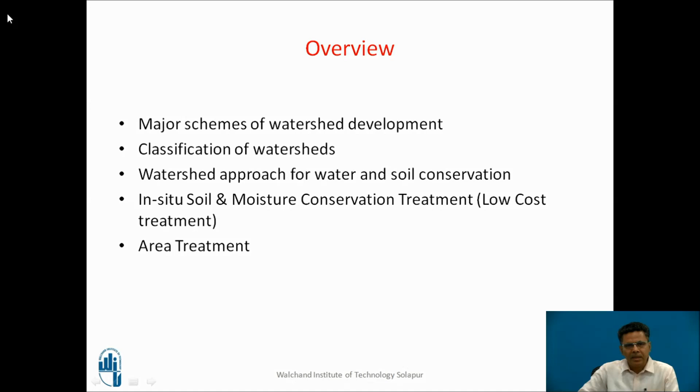What activities can be taken up in a watershed? Different sectorial activities can be taken up, such as soil conservation, water harvesting, rehabilitation of degraded areas, social forestry, agroforestry, horticulture, silvipasture, etc. These are distributed in different watersheds in different parts of a district.

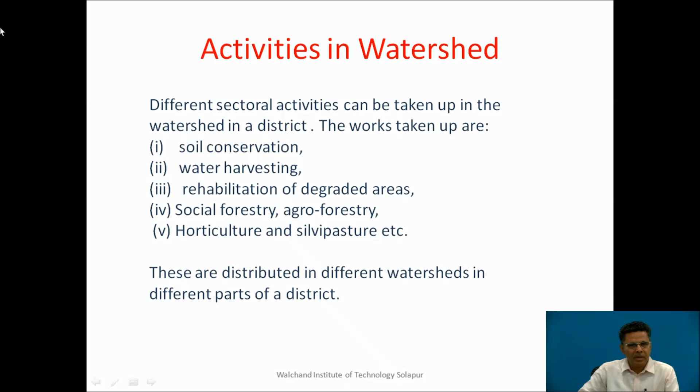Now let us see what is a watershed. A watershed is a geohydrological unit draining to a common point by a system of drains. We can observe this ridge line, which is a water divide, and a river originates from here, proceeds further, with tributaries joining it. As the river approaches the sea, it collects more discharge, gathering both water and sediments from the watershed. So both water management and sediment management are important.

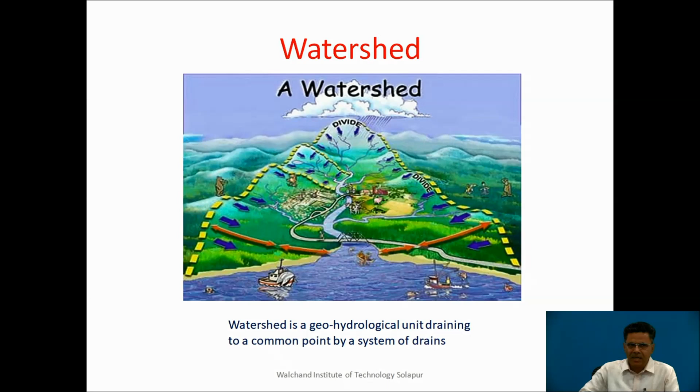Now let us discuss the definition of watershed development. A watershed is a geohydrological unit draining to a common point by a system of drains, as we have seen. Watershed development refers to the conservation, regeneration and judicious use of all natural resources, particularly land, water, vegetation and animals, and human development within the watershed.

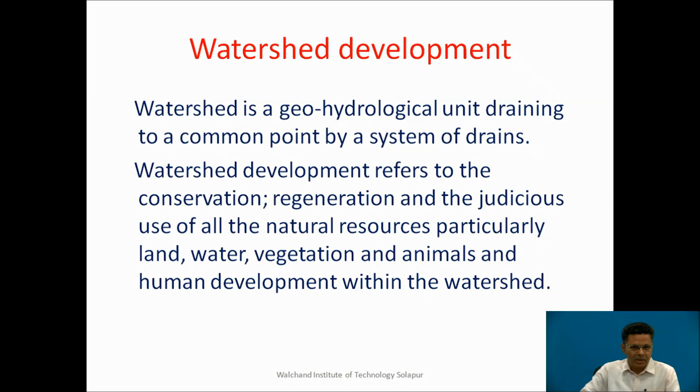What is watershed management? Watershed management is a term used to describe the process of implementing land use practices and water management practices to protect and improve the quality of water and other natural resources within a watershed, by managing the use of those land and water resources in a comprehensive manner.

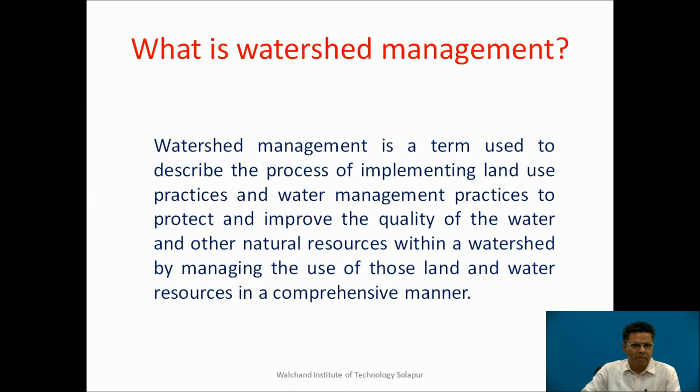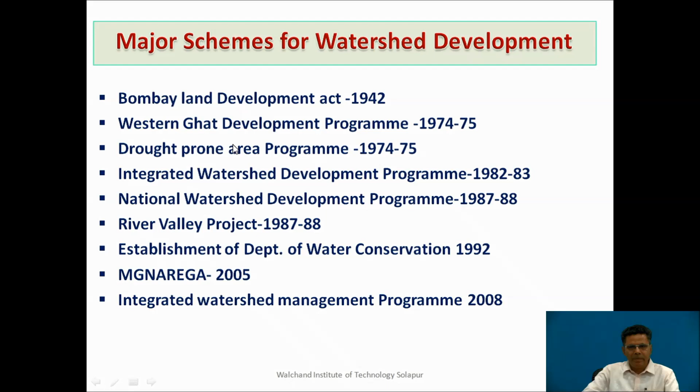Here are the major schemes implemented by the Maharashtra state government for watershed development over time: the Bombay Land Development Act 1942; Western Ghat Development Program in 1974-75; Drought Prone Area Program launched in 1974-75; Integrated Watershed Development Program started in 1982-83; National Watershed Development Program in 1987-88; River Valley Project in 1987-88; Department of Water Conservation for Maharashtra State established in 1992; MGNREGA started in 2005; and Integrated Watershed Management Program from 2008. All these schemes focus on watershed development and management in a broad sense.

Watershed treatment has been implemented in different ways over history. Compartment bunding below 750 mm annual rainfall was implemented from 1943. Graded bunding in assured rainfall zones was practiced from 1958. Terracing for high rainfall zones started from 1959. Earthen Nala Bandharas started from 1969, land leveling from 1985, diversion and cement nala bunds in 1989, EGS-linked horticulture from 1990, gabion structures from 1994, CCT and farm ponds from 1995, and deep CCT from 2012.

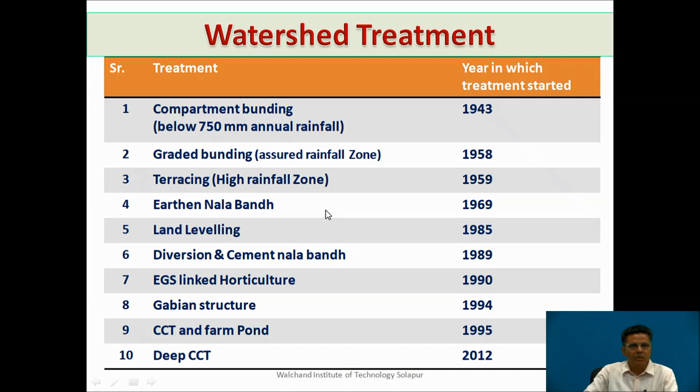Now let us see how watersheds are classified based on extent of area. When area is between 500 to 600 hectares, we call it a micro watershed. A watershed of area 3000 to 5000 hectares is a mini watershed. Area 15,000 to 20,000 hectares is called a sub watershed, whereas 30,000 to 40,000 hectares is called a GSDA watershed, and for a river valley there is no limit of area.

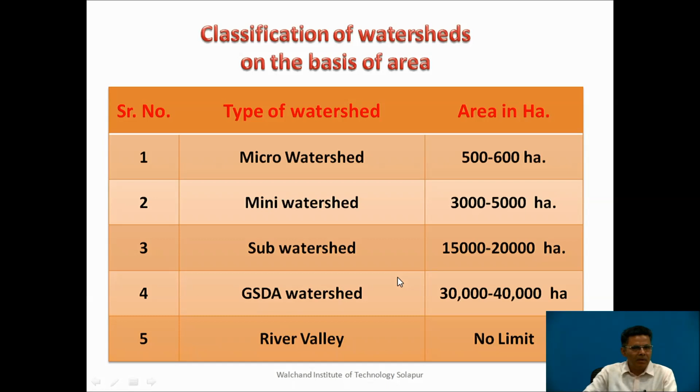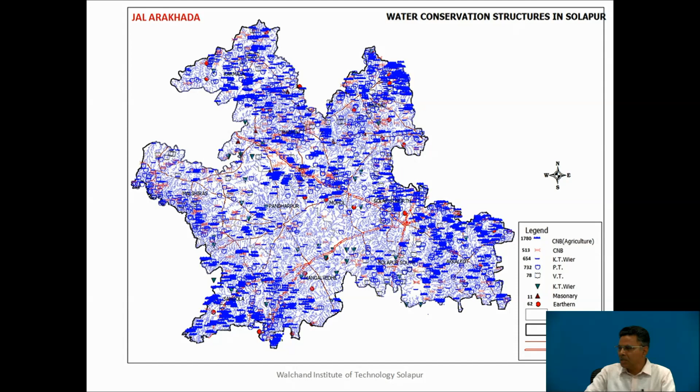This particular map shows the water conservation structures prevailing in the Solapur district of Maharashtra state. It gives an idea about the CNBs, KT weirs, masonry structures, earthen bunds, etc.

Now let us discuss what is meant by a watershed approach. This is a watershed and this is a ridge line of watershed, meaning it is a water divide. A drop of water falling on this side of the ridge line will come into this river system, while a drop falling on the other side will not come to this watershed.

The first zone near the ridge line is called the runoff zone. In this green shaded zone, here we provide the upper reaches treatment.

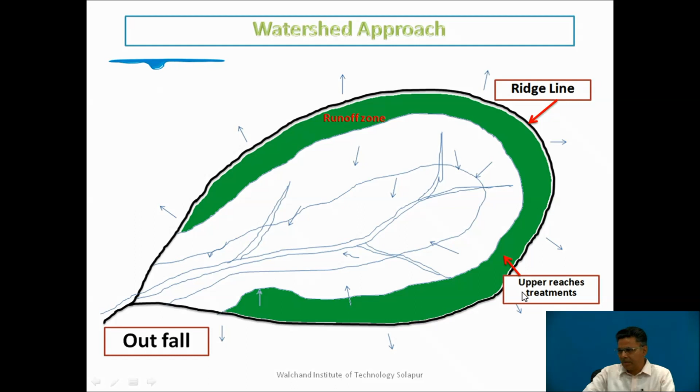Next, the zone in yellow is called the recharge zone, and the next zone is the storage zone. Three types of watershed development structures will be constructed, and they are different for runoff zone, recharge zone, and storage zone. The runoff zone has steeper slopes, the recharge zone has mild slopes, whereas the storage zone comes along the length of a river where we construct water and soil conservation structures.

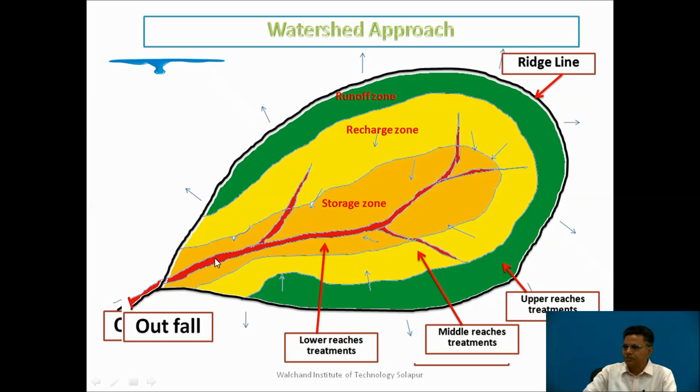This is the outfall of this catchment. This particular figure gives us the idea about the different structures which are constructed in the watershed.

For this hillock we see vegetative bunds, and on this hillock you can see typical continuous contour trenches. Here in low reaches we see Vanarai bandharas constructed, and here we see earthen structures like percolation tanks. Terracing is also done at higher elevations and so on.

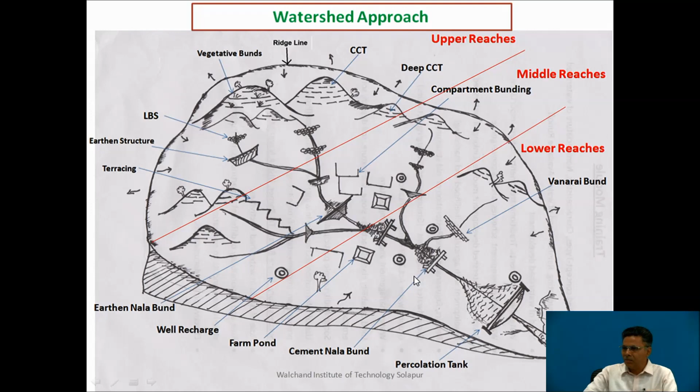Wells are recharged in the recharge zone. In agricultural fields we can have farm ponds, whereas cement nala bunds are constructed across a nala. This is a percolation tank, which we call Pazar Talav in Marathi. These are different structures constructed in a watershed for water conservation as well as soil conservation.

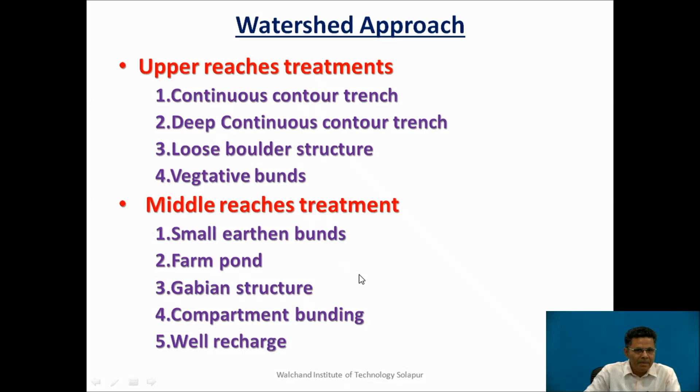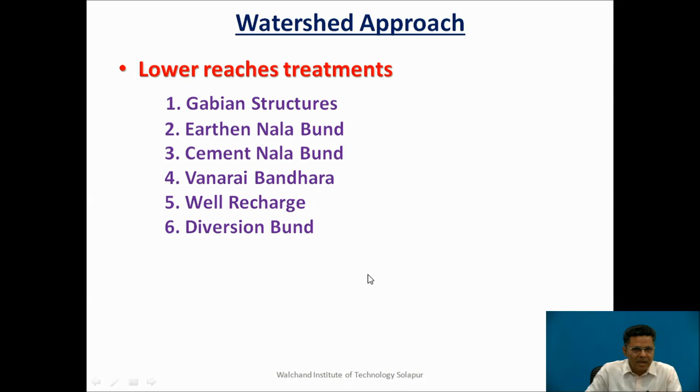Now let us discuss what type of treatment is given in upper, middle, and low reaches. In upper reaches we can go for continuous contour trenches, deep continuous contour trenches, loose boulder structures, and vegetative bunds. In middle reaches we can have small earthen bunds, farm ponds, gabion structures, compartment bunding, and well recharge. In low reaches we have gabion structures, earthen nala bunds, cement nala bunds, Vanarai bandhara, well recharge, and diversion bunds.

Let us see those one by one. The approach can also be discussed as area treatment, drainage line treatment, water management, and crop diversification. In area treatment we go for continuous contour trenches, deep continuous contour trenches, vegetative bunds, compartment bundings, well recharge, graded bunding, farm pond, and terracing.

For drainage line treatment, one has to adopt loose boulder structures or gabion structures, earthen nala bunds, cement nala bunds, Vanarai bandhara, diversion bunds, and percolation tanks. One should also think about water management and crop diversification for effective management of available water.

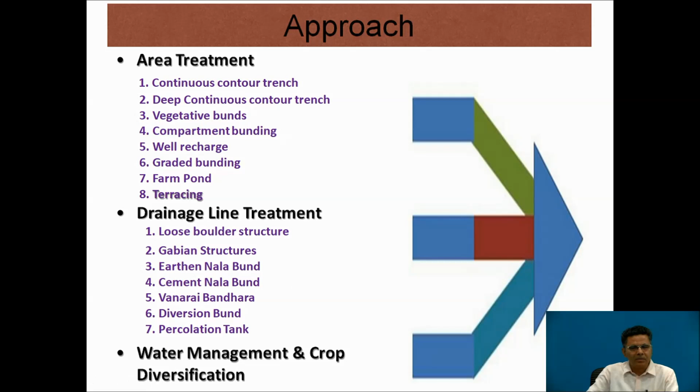Here, in situ soil moisture conservation treatment can also be called low cost treatment. The first technique is sowing and intercropping on contour, as shown in this example. We know water flows perpendicular to the contour, and we find that the water gets more time to penetrate into soil when cropping is provided along a contour.

One can also go for mixed cropping as shown here, which is also one of the best ways for soil and moisture conservation. Also one can have dead furrows, and also go for mulching. In mulching, dry leaves of vegetation are spread over the soil, which avoids direct penetration of sunlight into soil and thus conserves the moisture available with the soil to a great extent.

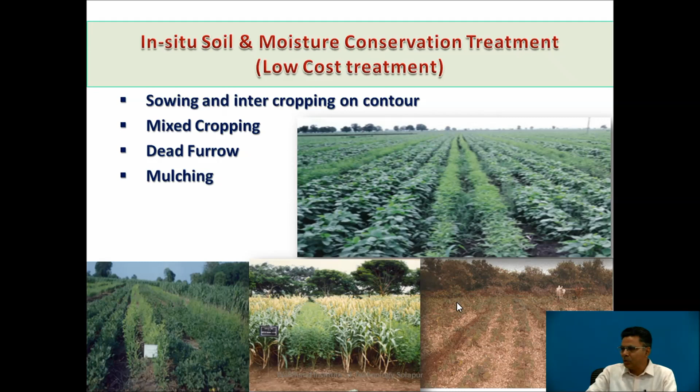Now let us discuss area treatment. The first technique of area treatment is the continuous contour trench. This is an upper reach treatment where slopes are reasonably steeper. It reduces the speed of water flow, conserves the soil, increases infiltration of water into soil, and increases area under cultivation. It is recommended for slopes from 0% to 33%.

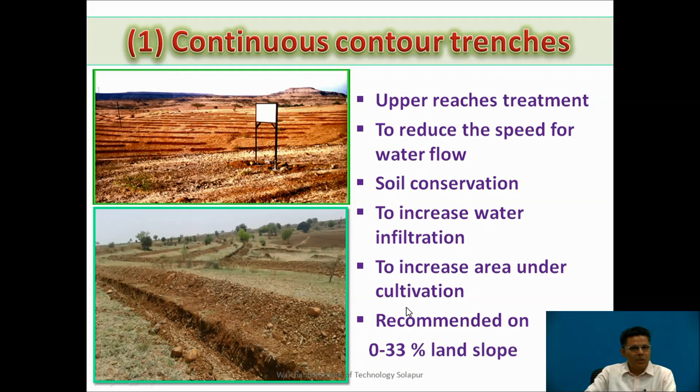So these are the pictures of the continuous contour trenches. These trenches are dug along the contours. You can see a person standing in the CCT, showing the depth of water and the volume of water that is collected.

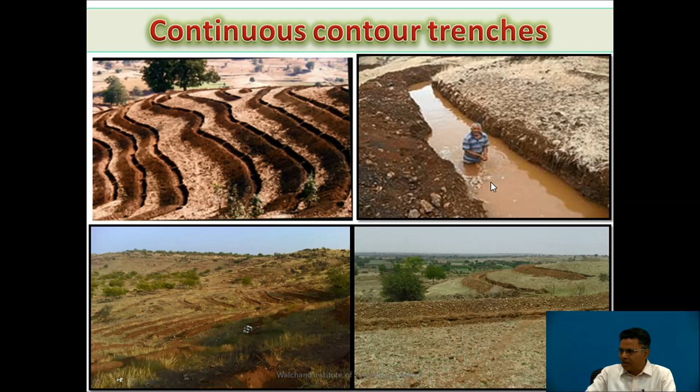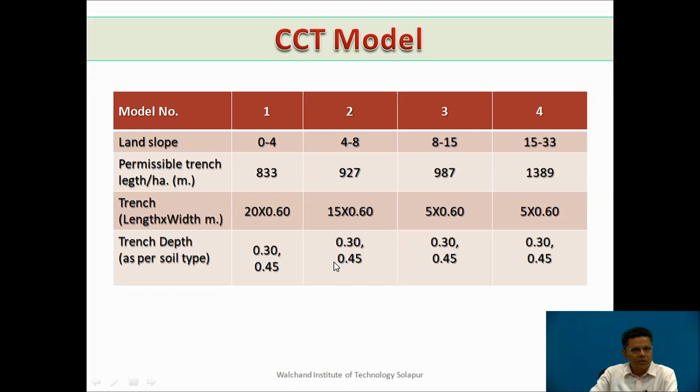One can have a number of models of continuous contour trenches depending upon the land slope: 0 to 4%, 4 to 8%, 8 to 15%, and 15 to 33%. In this model, for 4 to 8% slope, the permissible trench length per hectare can be 927 meters, meaning in 1 hectare you can have trenches of total length 927 meters. For a particular trench, the length should be 15 meters, the width 0.6 meter, and the trench depth will depend upon the soil type, which can be 0.3 meter or 0.45 meter and so on.

Now let us discuss deep continuous contour trenches. These come under upper reaches treatment and are effective in DPAP areas. They improve groundwater level by percolation, conserve soil, and water storage up to 2.4 lakh liters per hectare can be achieved.

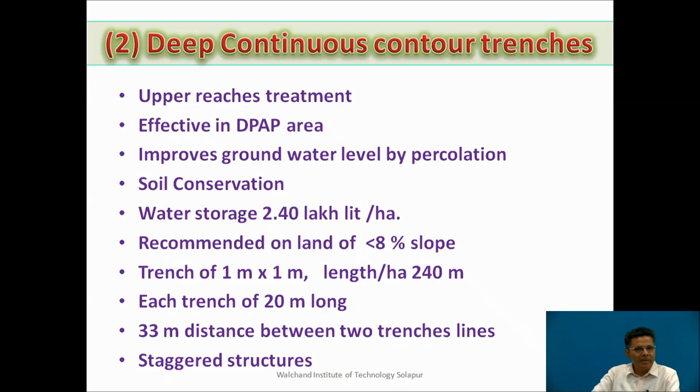Deep continuous contour trenches are recommended on land with slope less than 8%. A trench section is 1 meter by 1 meter, with length per hectare up to 240 meters. Each trench may be 20 meters long, with 33 meters distance between two trench lines, and the structures are to be staggered.

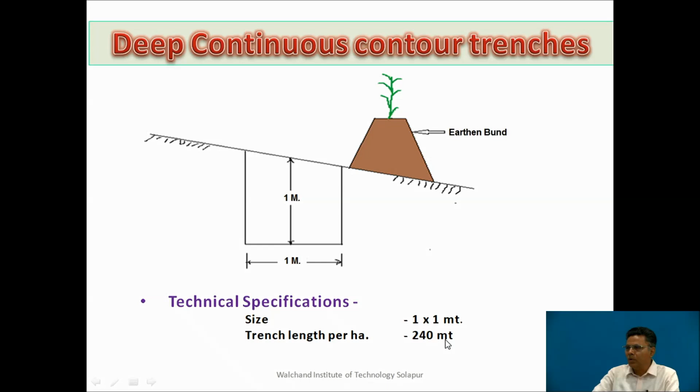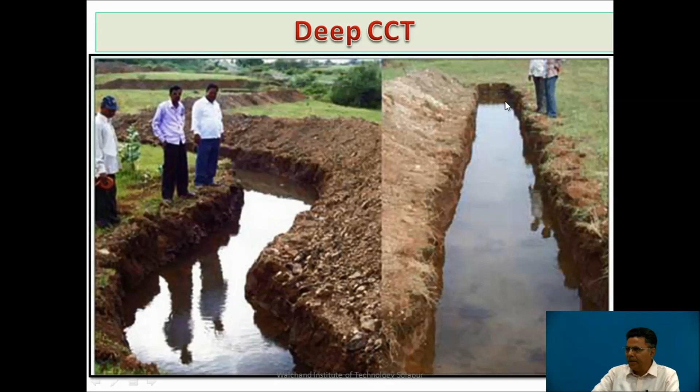If you see carefully, the section is 1 meter by 1 meter. This is the earthen bund, and the trench length per hectare is limited up to 240 meters. So these are the deep CCTs, where the width, depth, and length of an individual trench can be understood.

Let us discuss once again. Compartment bunding is a middle reaches treatment. It is used to improve the water holding capacity of soil, improves soil fertility, and conserves soil. It is recommended in areas where rainfall is up to 750 millimeters.

It is recommended for land with slope up to 4%. Work should be done with the ridge to valley concept. It must be on a continuous total area, not a scattered area. Prepared bunds should be protected by farmers with vegetation, and a waste weir is a must to remove excess water.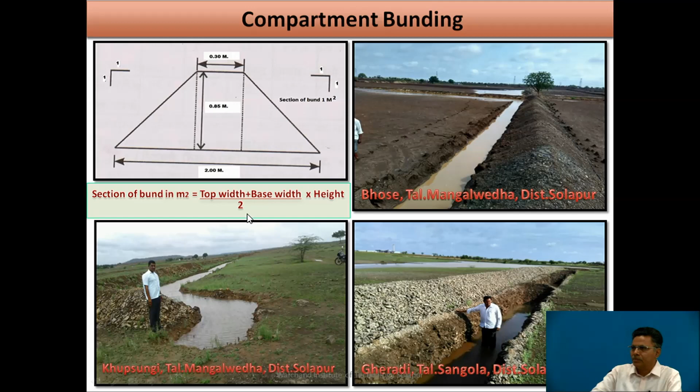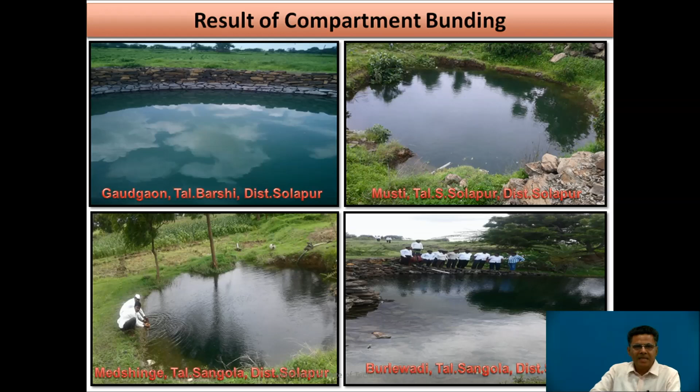One more way of water conservation is well recharge. Let me first show you the picture. This is a well, and here there is a filter tank to prevent sediments from entering the well. This is a storage tank of raw water, which passes through the filtration tank and then goes into the well.

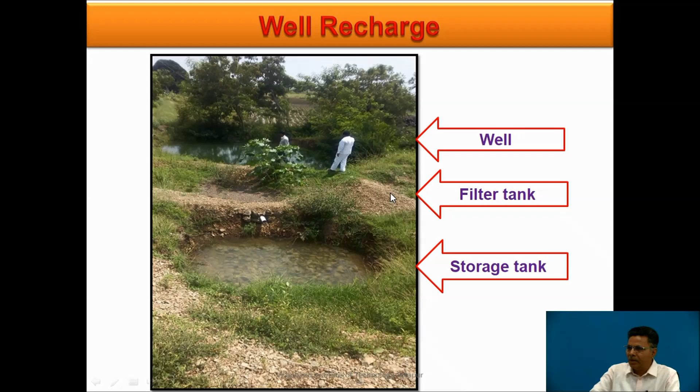So the same schematic is shown here. This is a storage tank, which receives water from the inlet. Thereafter it is passed to a filter consisting of sand, gravel and stones, and then the water is allowed to go into the well for recharge.

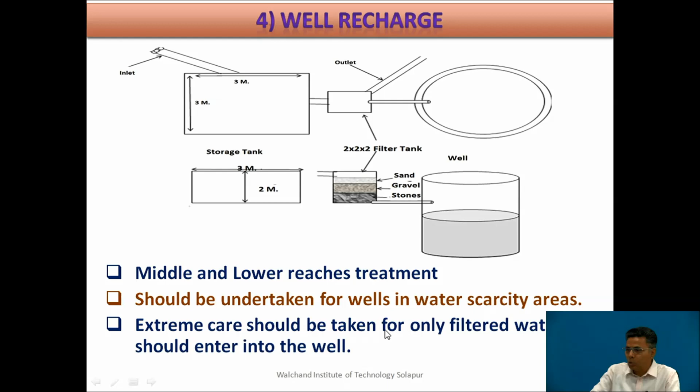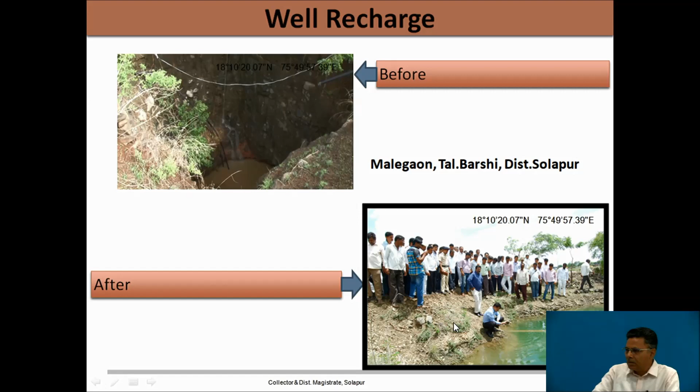This is a middle and low reach treatment. It should be undertaken for wells in water scarcity areas. Extreme care has to be taken so that only filtered water enters the well. So before adopting well recharge techniques, see at what depth water is, and after recharging the same well, one can see the considerable rise in water level.

We can see the well recharge work ongoing here. This is a filter under construction, and this is filtered water coming inside the well for recharge. So this is the recharged well. Just see the arrangement of recharging, with filtered water coming into the well which is constructed with a concrete wall.

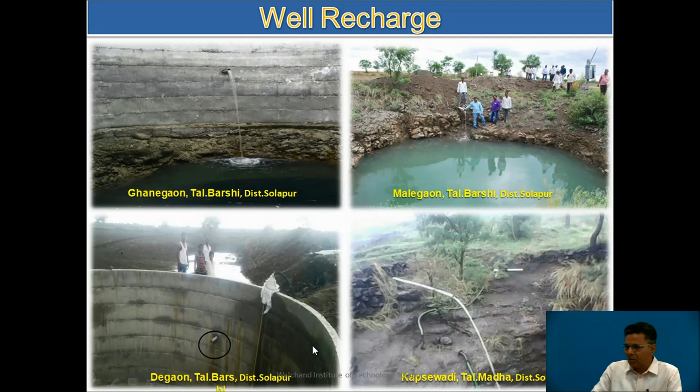We can recharge the tube well also. So here we see how tube well recharge can be done.

Now, farm ponds. A farm pond is a middle reach treatment. It is constructed on private land and the water is used for protective irrigation. It improves groundwater level and is recommended on land with up to 3% slope.

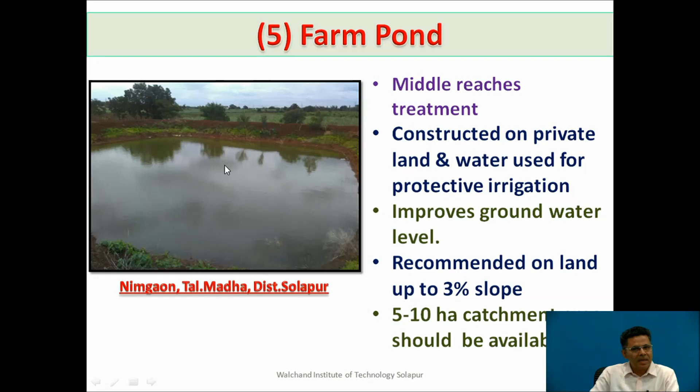A farm pond should have a catchment area of 5 to 10 hectares so that sufficient water can be stored in the farm pond. The water from the farm pond can be used for supportive irrigation for horticulture as well as other crops.

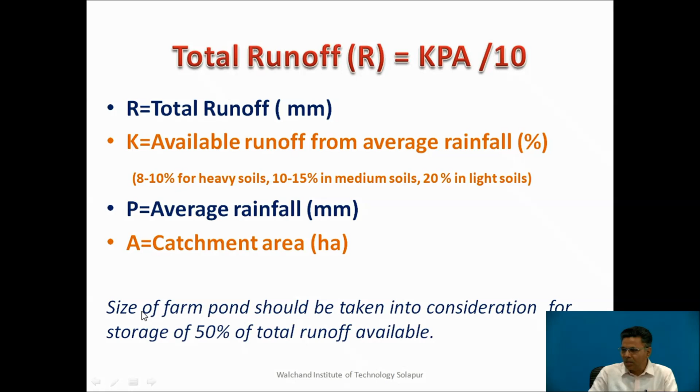Total runoff is given by the equation R equals K into P into A divided by 10, where R is runoff in millimeter, K is available runoff from average rainfall percentage. The values are 8 to 10% for heavy soils, 10 to 15% for medium soils, and 20% for light soils for K, whereas P is average rainfall in millimeter and A is catchment area in hectares. The size of the farm pond should be taken into consideration for storage of about 50% of total runoff available.

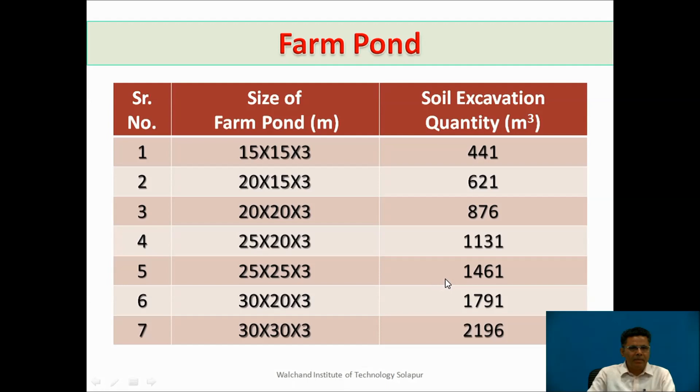This slide gives us the sizes of farm ponds and required soil excavation in meter cube. So for a farm pond of size 25 meter by 25 meter and 3 meter deep, we may need to do excavation of 1461 meter cube.

Here we can see the farm pond, see the slope which is given to the sides of a farm pond, and when water is stored in the farm pond, how it looks. One can also use plastic paper to reduce the seepage of water through the farm pond.

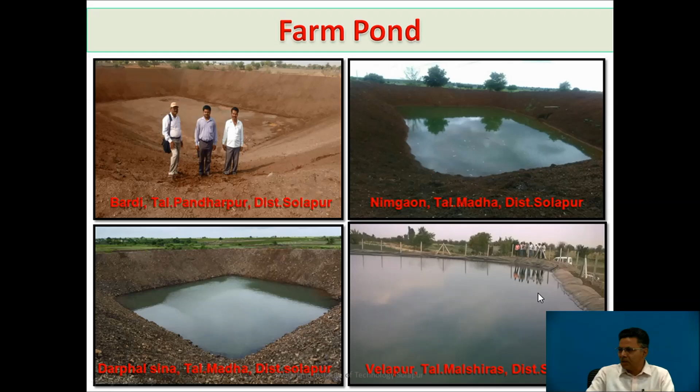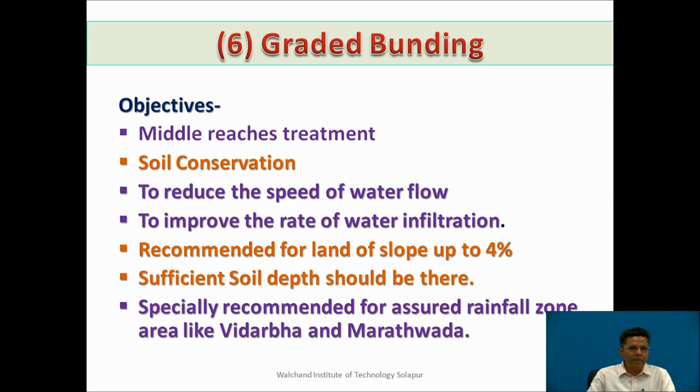Next technique is graded bunding. Objectives are such that it is a middle reach treatment. It is used for soil conservation as well as water conservation. It reduces the speed of water flow, improves the rate of water infiltration, and is recommended for a slope up to 4%. Sufficient soil depth should be there when we want to adopt graded bunding, and it is specially recommended for assured rainfall zone areas like Vidarbha and Marathwada.

So just see, this is a graded bunding. Technical specifications again depend upon slope. For example, for a slope of 2.4%, the base width can be 2 meter, the height of the bund can be 0.75 meter. The top width should be 0.5 meter, and the side slope has to be 1:1.

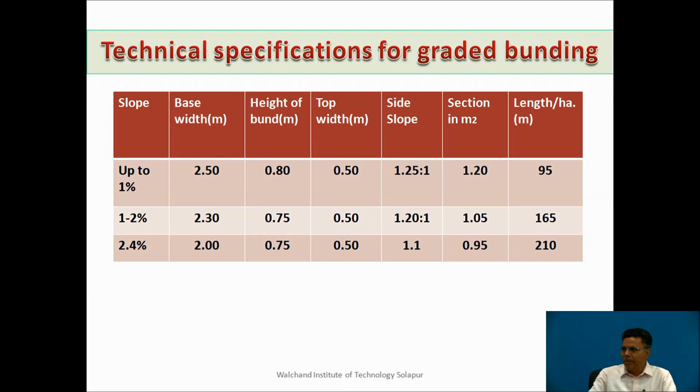Section in meter square will be 0.95 meter square, and length per hectare can be 210 meter. So in 1 hectare area you can have about 210 meter length of the graded bunding.

Now terracing. So just see, this is a terracing. In steeply sloping areas, when we want to go for agriculture, we need to construct such terraces. Terracing is an upper reaches treatment. It is recommended in high rainfall zones, that is more than 1000 meter, and in paddy areas, meaning in Konkan regions we adopt this.

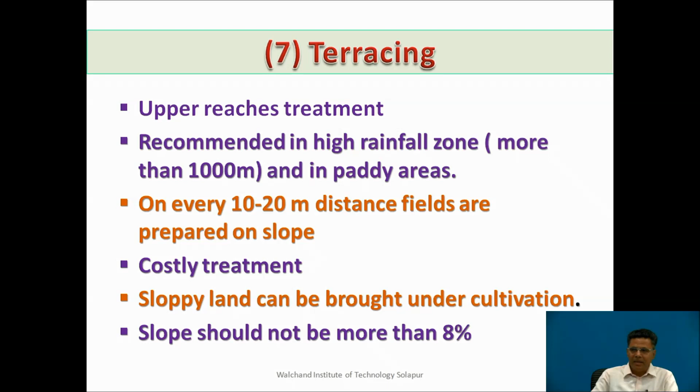On every 10 to 20 meter distance, fields are prepared on the slope. It's a costly treatment. Sloping land can be brought under cultivation by terracing. Slope should not be more than 8%.

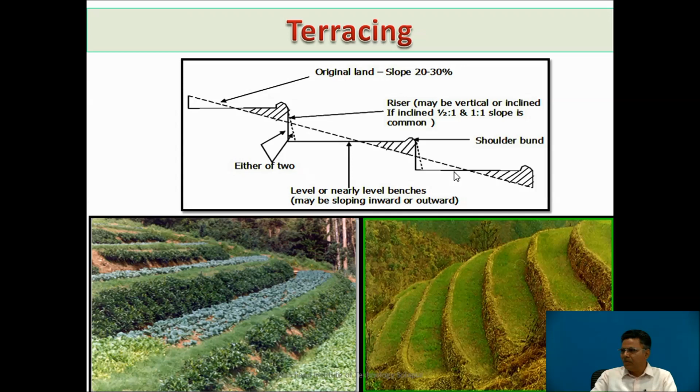So just see here, this dotted line shows the original land of slope 20 to 30%, whereas this is a modified profile of a land. We cut here and we fill here, and this is a shoulder bund. Benches are constructed here, and then we have these terraces here where one can go for a crop in this way.

Now let us discuss how we go for drainage line treatment. The first treatment which we discuss here is loose boulder structures.

This is an upper reach treatment in hilly areas and light soils where continuous contour trenches work is not possible. We should have sufficient boulder stones available nearby, and then these loose boulder structures will make the running water slow, giving time for percolation.

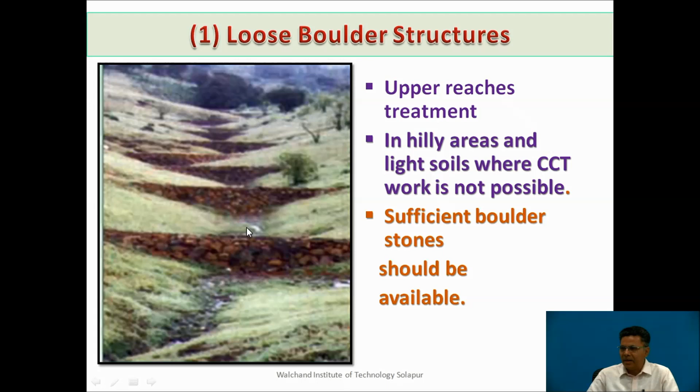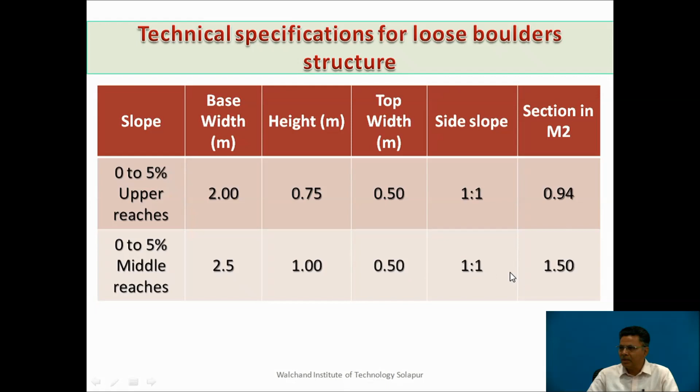It will also conserve soil and water reasonably. The technical specifications for loose boulders, for example, for a slope of 0 to 5% in middle reaches: the base width can be 2.5 meter, height can be 1 meter, top width can be 0.5 meter, side slope can be 1 to 1, section 1.5 meter square.

So one can see the loose boulder structures which are constructed at Boroti in Akkalkot Taluka of Solapur district. Here this is a loose boulder structure constructed at Tarangphal, Malshiras Taluka, Solapur.

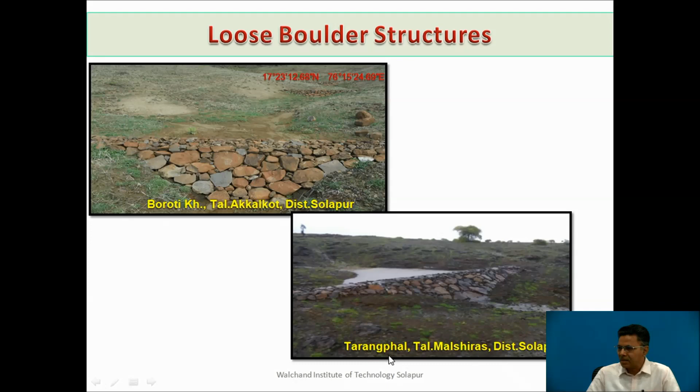Now let us discuss earthen structures. Earthen structures are upper and middle reach treatments. Earthen bunds are prepared in upper reaches where loose boulders are not available.

It reduces the speed of water flow, improves the rate of water infiltration, and conserves the soil. The catchment of such an earthen structure should not be less than 10 hectares.

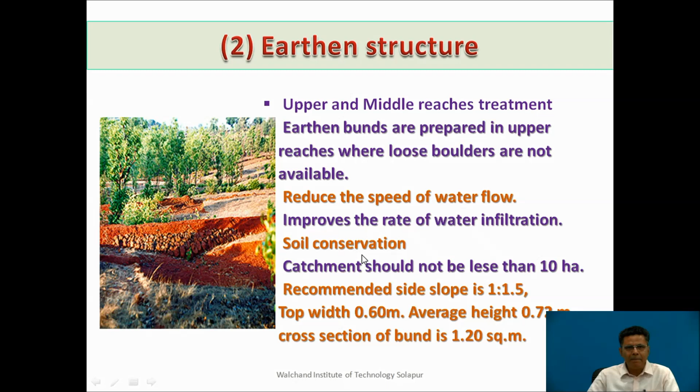Recommended side slopes of this structure are 1 is to 1.5, top width 0.6 meter, average height 0.72 meter, and cross section of the bund is about 1.2 square meter. So these are the type designs for the earthen structures. Now slightly bigger than that, there is an earthen nala bund.

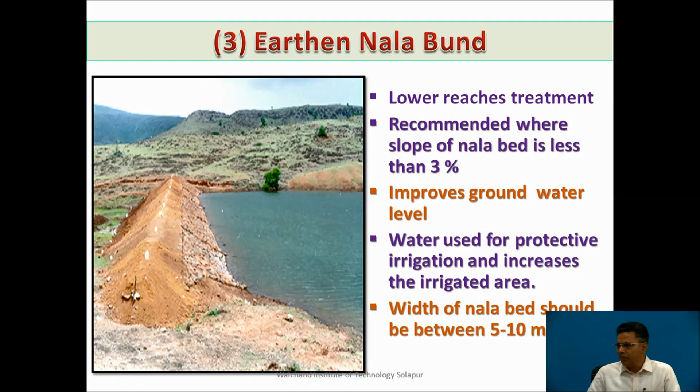It is a lower reach treatment, meaning where we store the water. It is recommended where the slope of the nala bed is less than 3%. It improves the groundwater level because the water stored against the earthen nala bund percolates and works as a percolation tank. Water is used for protective irrigation and increases the irrigated area. Width of the nala bed should be between 5 to 10 meters.

Now there are special structures called gabion structures. These come under low reach treatment. What is a gabion structure? Loose boulders are tightened together with a wire mesh. We can see the wire mesh which is tightly binding the loose boulders.

It reduces the speed of water flow, thus reducing erosion. It is easy and low cost as compared to earthen nala bunds and cement nala bunds. It also improves the groundwater table. It is specially recommended for soil conservation; more than water conservation, it is better for soil conservation. Its height should not be more than 1 meter.

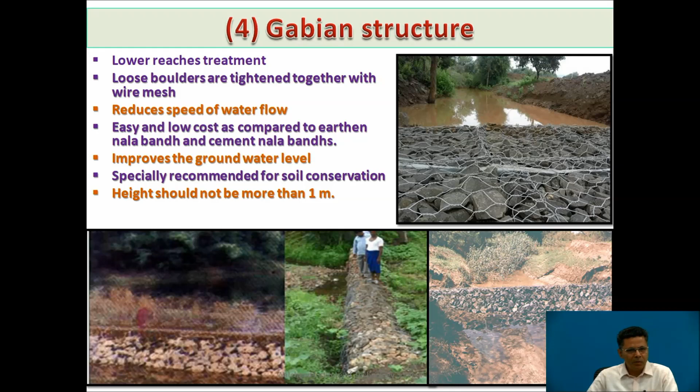We know that a 30 centimeter layer of topsoil ultimately supports the crops and vegetation from which we get food grains. Now let us discuss the cement nala bunds.

This is a cement nala bund, as you see, constructed in masonry and plastered with cement. It is a lower reach treatment, recommended in low reaches of a watershed. It is just like a gravity dam, so it should have hard rock at the base.

There should be cultivable land on both sides of the selected site so that we can pump the water stored in the cement nala bund and use it for protective irrigation. Due to storage, it also increases the groundwater level. Water can be used for protective irrigation.

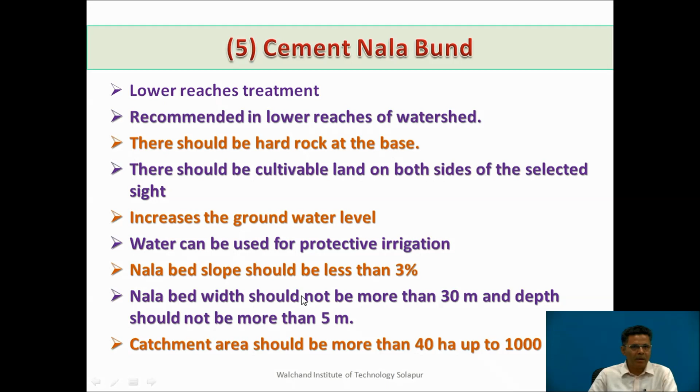Nala bed width should not be more than 30 meters and depth should not be more than 5 meters. Catchment area should be between 40 hectares to 1000 hectares so that sufficient water can be accumulated in the cement nala bund. So this is the cement nala bund.

This is where excess water will flow over, and what is stored on the upstream side of this nala bund can be used for protective irrigation.

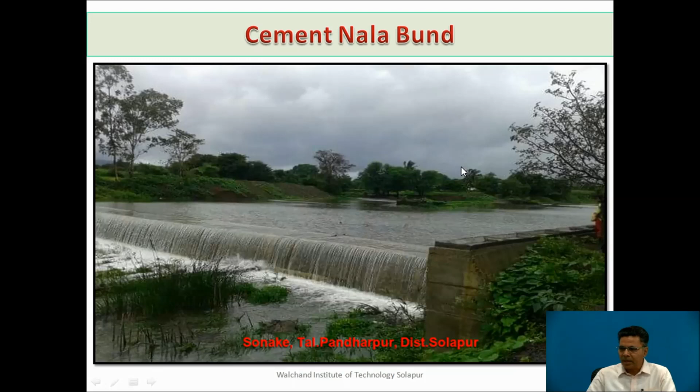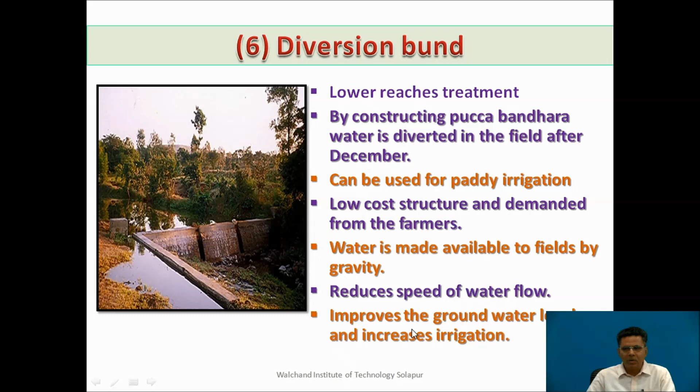So this is the advantage: it reduces the speed of water flow, improves the groundwater level, and increases irrigation.

There is one special type of bandhara called Vanarai bandhara. It is again a low reach treatment. Here we use empty cement or fertilizer bags which are available in ample supply with farmers. They are filled with soil and sand and then the bandhara is constructed.

Basically, the activity is implemented through people's participation. It partially fulfills the water needs of water scarce villages. Bandharas are constructed at the end of the rainy season, and the height of the bandhara is up to 1 meter.

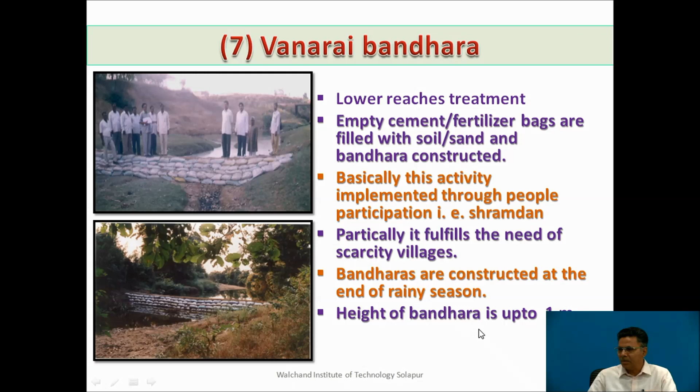Every watershed treatment has its own life. Once constructed, we cannot expect them to exist and work for 50 or 60 years. Rather, there is siltation in continuous contour trenches, and at the same time there is erosion of the bunds and so on. So it needs regular maintenance.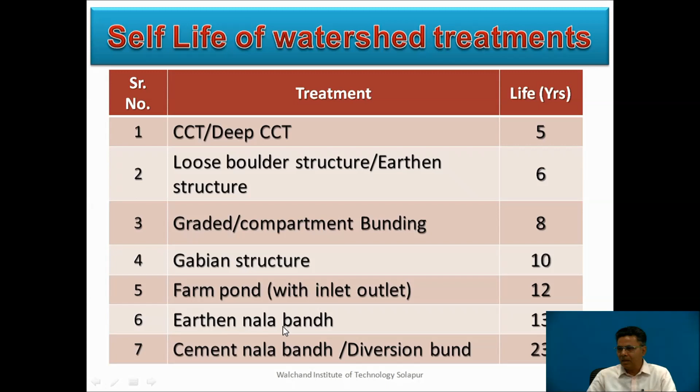So the self life of watershed treatments: for CCT it is 5 years. Loose boulder structures or earthen structures have a life of 6 years. Graded and compartment bundings have a life of 8 years. Gabion structures have a life of 10 years. Farm ponds have a life of 12 years. Earthen nala bandharas have a life of 13 years. Cement nala bunds can have a life up to 23 years.

So in conclusion, watershed management is a term used to describe the process of implementing land use practices and water management practices to protect and improve the quality of water and other natural resources within a watershed, by managing the use of those land and water resources in a comprehensive manner.

And the outcomes are prevention of soil erosion, regeneration of natural vegetation, rainwater harvesting, and recharging of the groundwater table. Of course, the recharged groundwater comes to help the farmers through wells. This enables multi-cropping and the introduction of diverse agro-based activities, which helps provide sustainable livelihoods to the people residing in the watershed area.